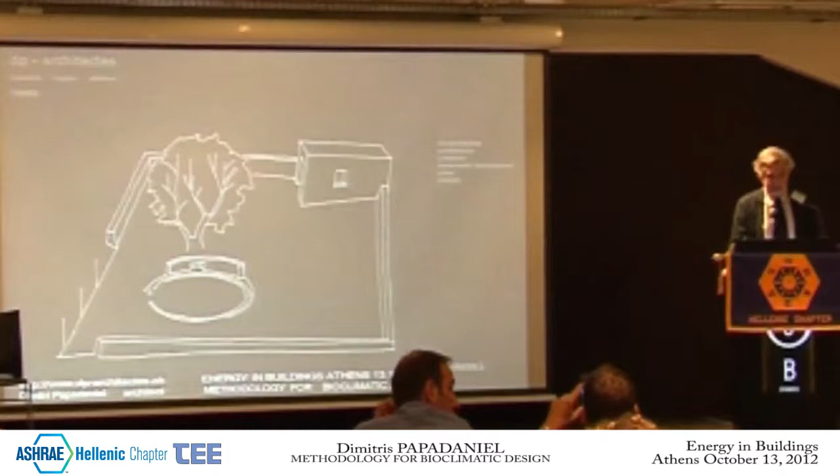I would like to thank the chair, Mr. Tsirakis, and I'd also like to warmly thank Jean-Louis Scartezzini, for he really emphasized on the sort of cooperation there should be between architects and engineers. And this is very important. This is actually what I tried to insist on this morning in my opening speech.

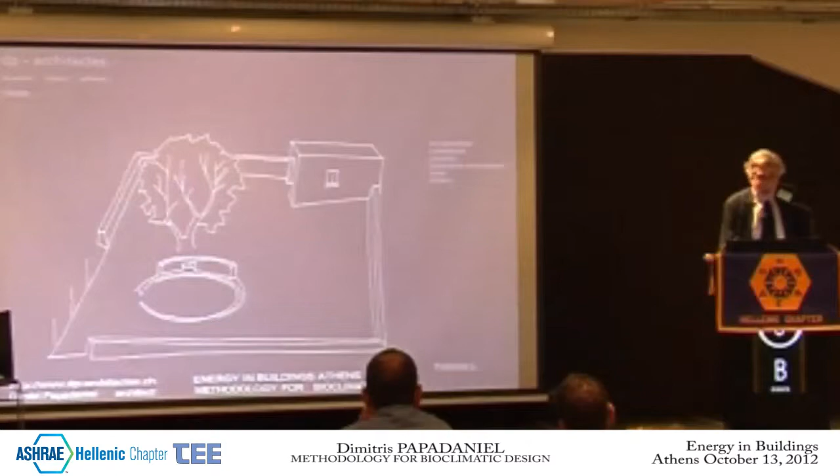What we emphatically call bioclimatic design today is nothing more and nothing less than the rational approach of planning for technical projects. So this brings together the civil engineer, the mechanical engineer, and the architect. They're all working together, which means that in bioclimatic design, there is a set of parameters that we need to take into account, including the environment, topography, climate, the landscape, the city or town, respect for the environment, and energy management.

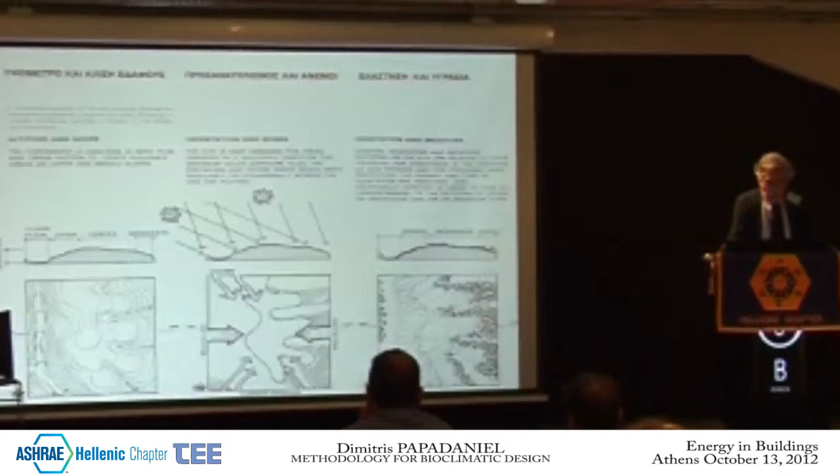No matter which way you might look around the globe, traditional architecture and projects are in line with rules and the technology that aligns itself with nature, landscape, local climatic conditions, topography, the fabric of the city, and of course use of local material matters.

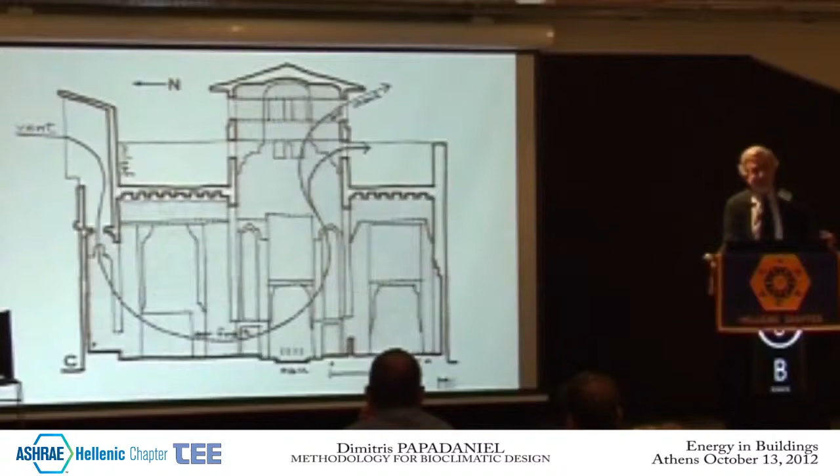What we are discussing today, free cooling, has been there by tradition. So free cooling is not actually something that wasn't there. It's not every day that we discover the principles behind architecture and physics.

I could, in a rather trivial manner, say that tradition is intertwined with our background and experience. So tradition is there to teach us. Every form and shape corresponds to particular circumstances.

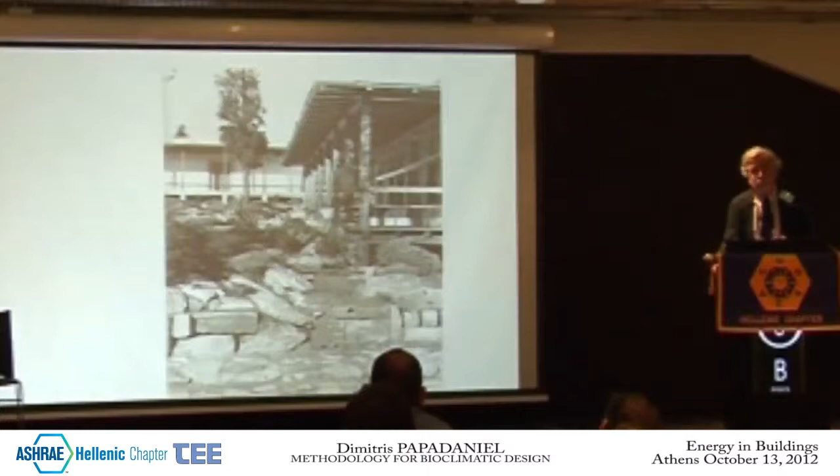All the concerns about bioclimatic architecture are quite apparent, along with the basic fundamental principles thereof. They are obvious in major architects' projects and works such as Pikionis, who used local material, and Konstantinidis, who played with the light and the shadow. He would just make terraces or gardens for daylight or maybe evening.

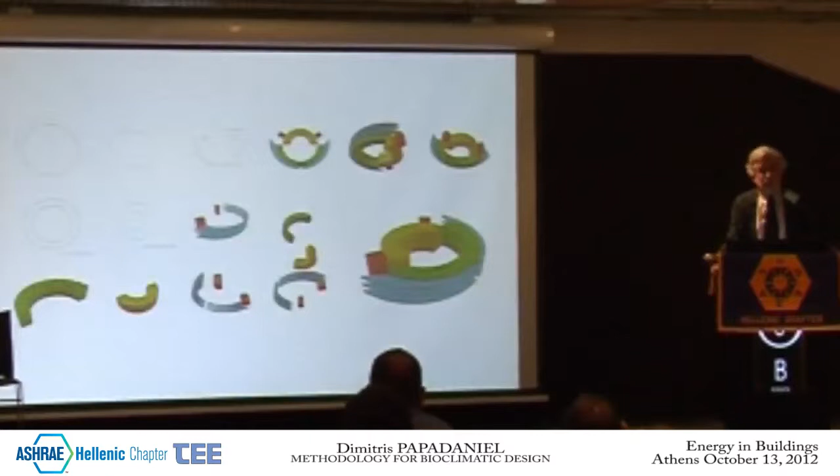And then Zenetos, who quite early had come to realize the importance of the sun's geometry, mostly through the Agios Dimitrios school he built, because he introduced a design that aligns itself with the course of the sun through the day. And so classrooms are quite protected in terms of intense solar light, but the overall outcome is quite impressive.

So, before the majority of people realized there was an issue with regard to energy consumption and savings, before people actually thought about environmental protection, it seems that everything was there. It reminds us of the bourgeois gentilhomme of Molière, who had been speaking prose all his life without really knowing it. So the overall problem that contemporary societies are faced with is quite complex.

Because it regards the protection of our planet, the legacy and heritage of the planet which we need to preserve, quality of life that we need to preserve, our economies, production, peaceful balance for the sake of everyone on this earth, and the preservation and protection of our children's future. So this is all integrated in the notion of sustainable development and viable development.

When we talk about planning, designing, and constructing buildings, there are some fundamentals that we need to bear in mind always. Like I said before, we have to bear in mind the topography, climate, urban characteristics, the environment. We have to carefully select materials we're going to use. We have to ensure there's solar protection, cooling, ventilation, and maybe renewable energy sources will be used.

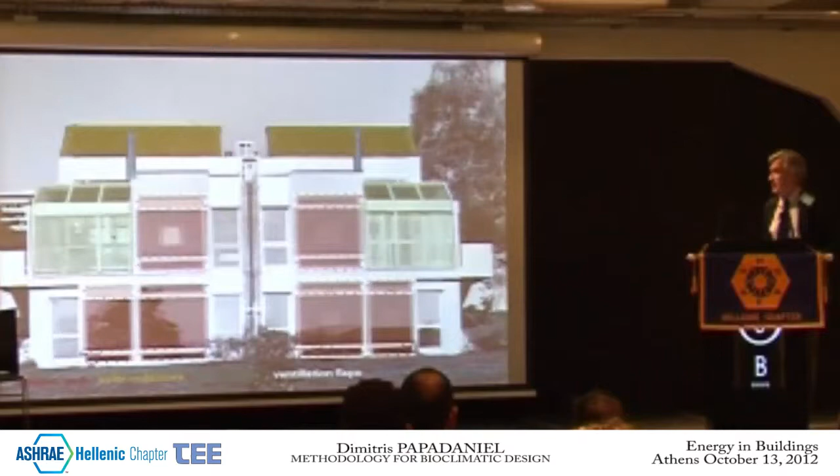Take advantage of. Trombe walls, I guess, are something you're familiar with. Maybe we're no longer using them; they were quite popular a few years ago, part and parcel of our experiments. We also have solar panels to get warm water, and we're also using those panels for heating. We also have verandas and greenhouses overall; we get the air through them and use that part of the air to complement heating for the house. And then you have aeration and ventilation systems in the walls.

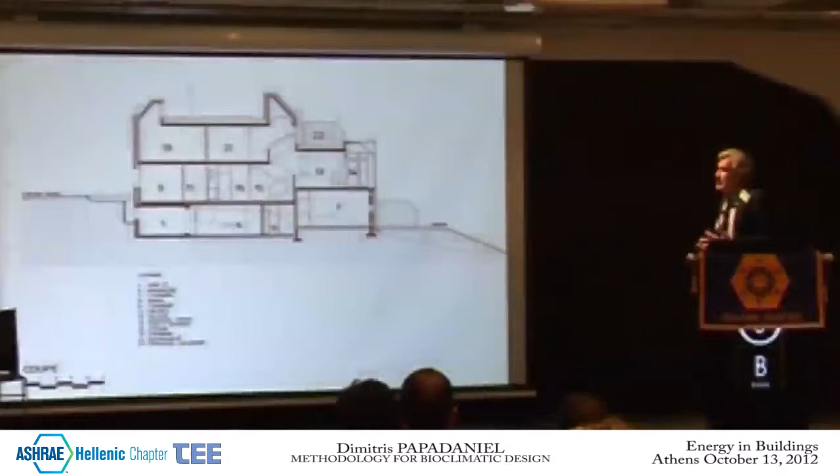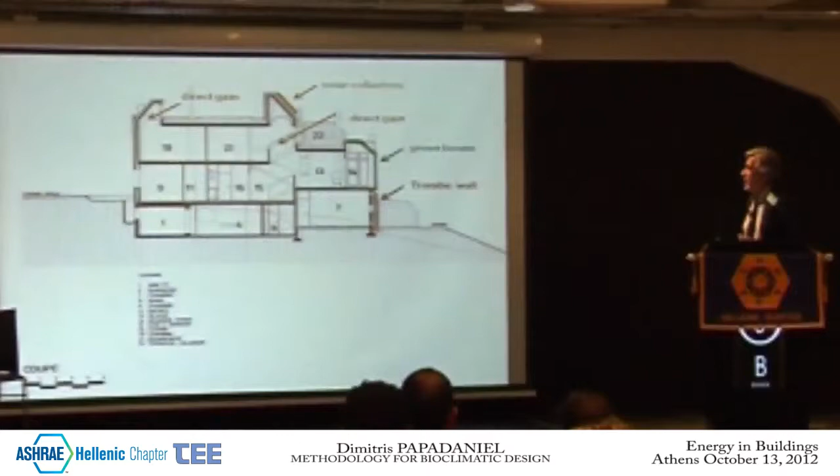Here I come to the issue of morphology, because I touched on it before. Earlier on, we talked about bioclimatic design, and in this particular case you have a narrow house, and you have the cross-section. We are aligning ourselves with the sun, using solar collectors, direct lighting, direct gains there. Greenhouse and Trombe walls are used.

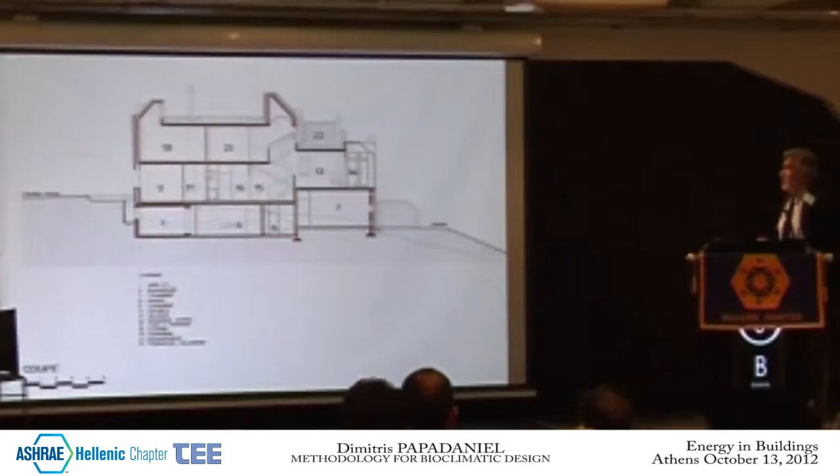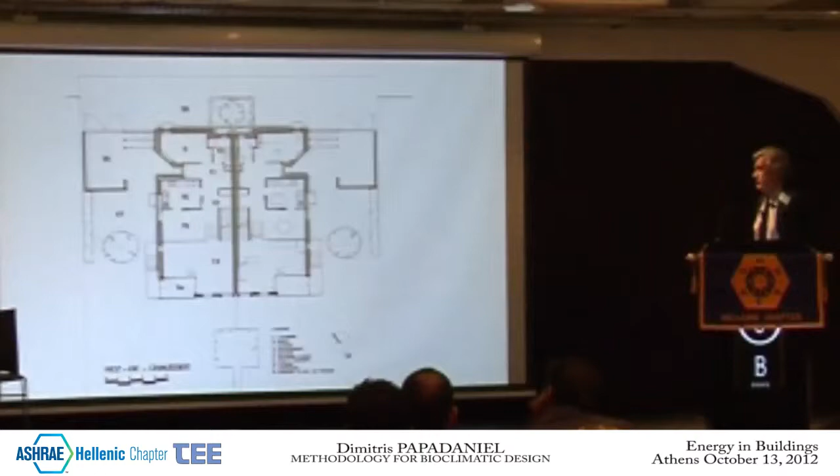This house was designed in such a manner as to ensure there is natural ventilation and cooling in the summer. Moreover, this is a well-insulated house; we insulate it quite strictly, and we avoided thermal bridges. And of course, we are capitalizing on the sunlight, depending on the geometry we opt for.

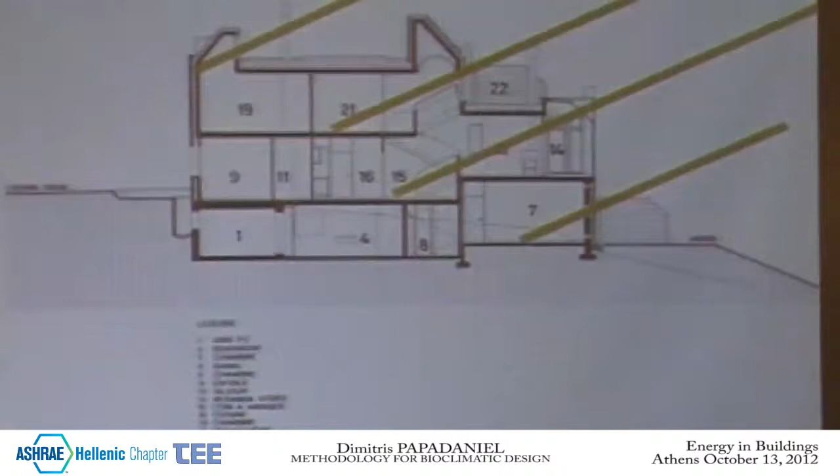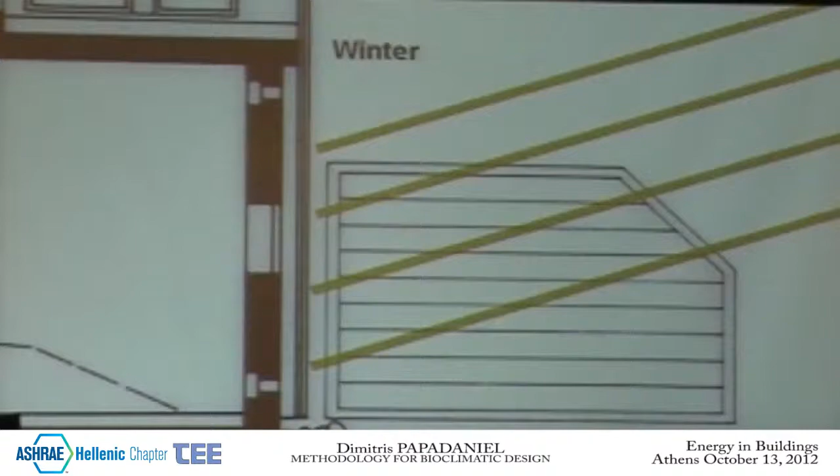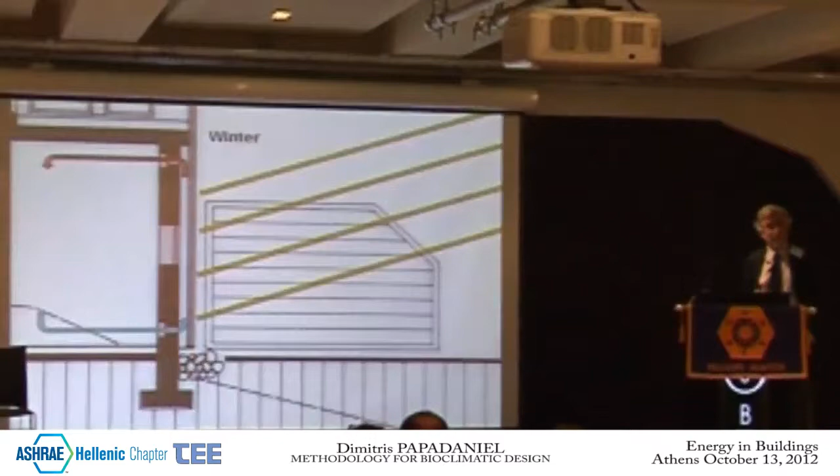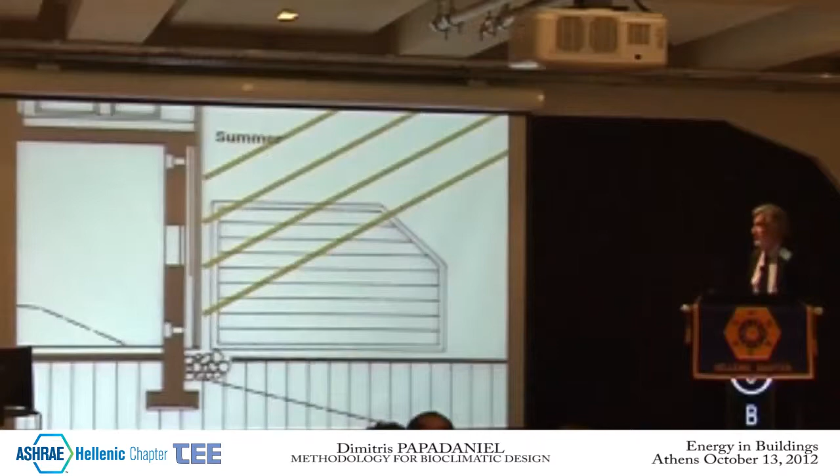Trombe walls, as you know, are charged and heated by the sun in winter, and so there you have thermal circulation, which helps keep the room warm. In this case, this whole system and methodology worked perfectly. And then you have the summer, where you have protection and at the same time simultaneous cooling and ventilation.

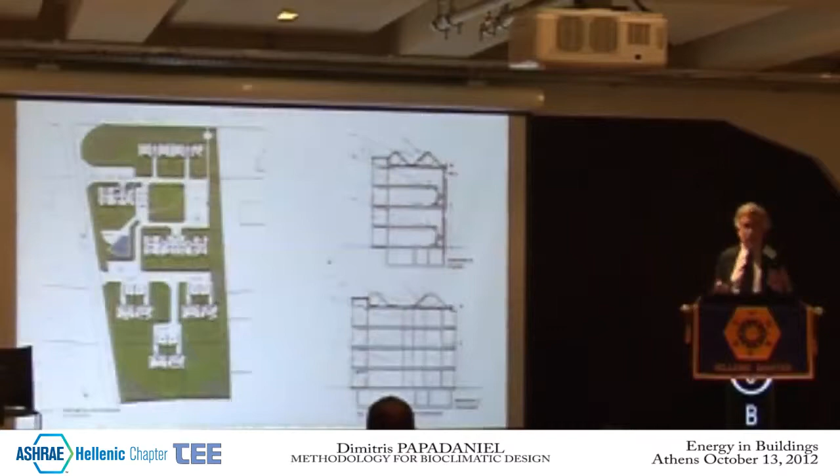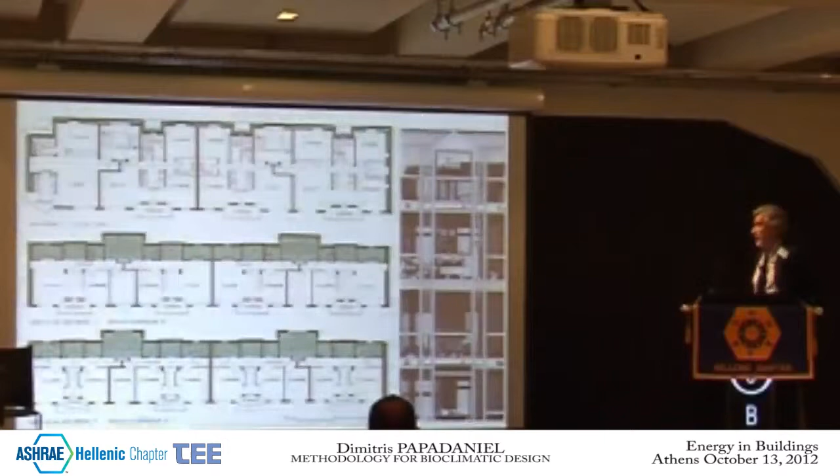I am just touching on several experiments which we've been conducting since 1985 and through today. Here you have another photo, a solar residential complex close to Lausanne. In this case, the houses are positioned so as to avoid one shadowing the other. We are using several typologies to make sure we protect the houses from the cold, but we're also using methodologies to protect these houses from the noise. This is actually something that both Mr. France and Mr. Berriela touched on earlier, because they were both concerned with protection against noise pollution.

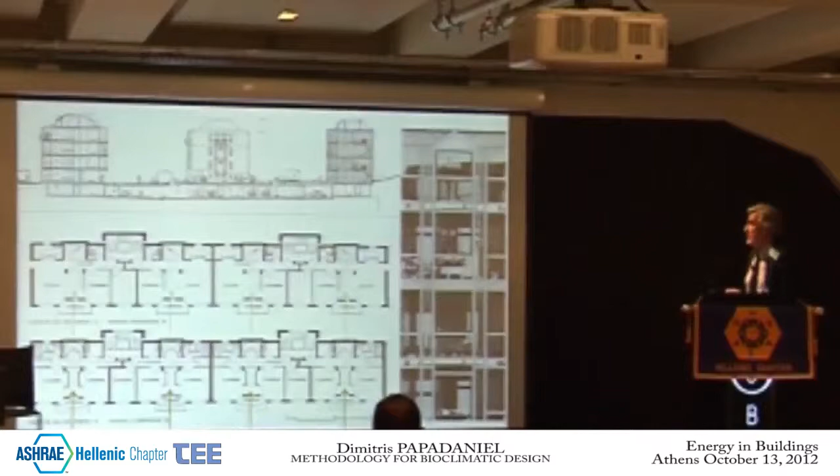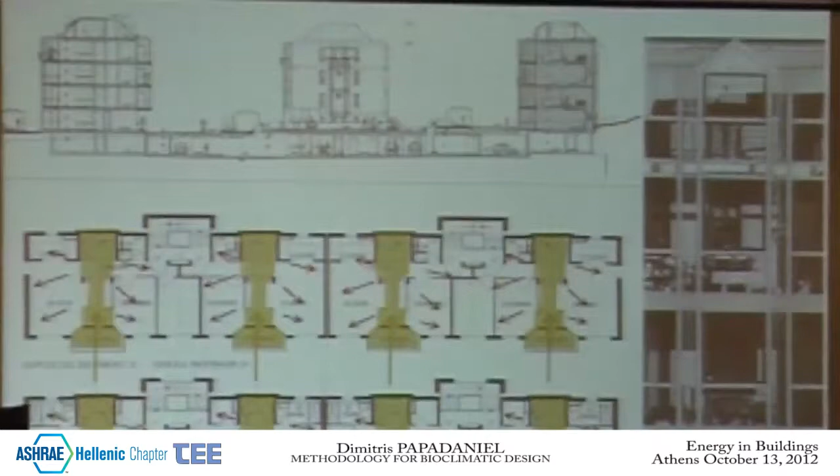In those very typologies, let's opt for one. In this case, you have the light penetrating the houses, just like I showed you before. Light goes into the house through slits we've opened, and so you have openings that work on two levels, keeping the interior warm and having the light reflect to adjacent rooms.

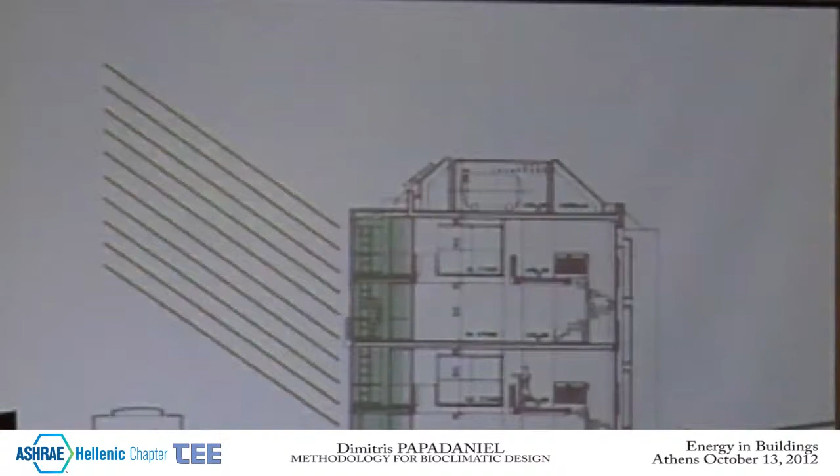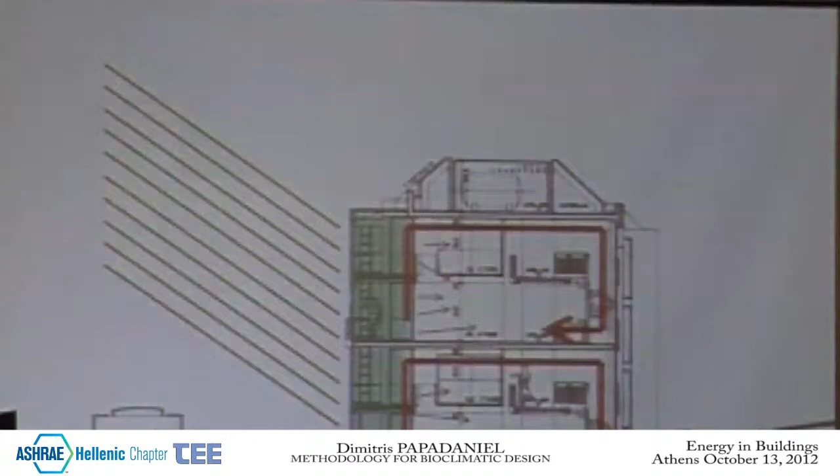Moreover, here you have an aeration system of ventilation. You get warmth through the solar light coming in through the porches or the greenhouses, and you get, again, a dual system because the walls get warmed in the greenhouse, veranda or terrace, and then there's a system which carries the air inside the house. This residential complex.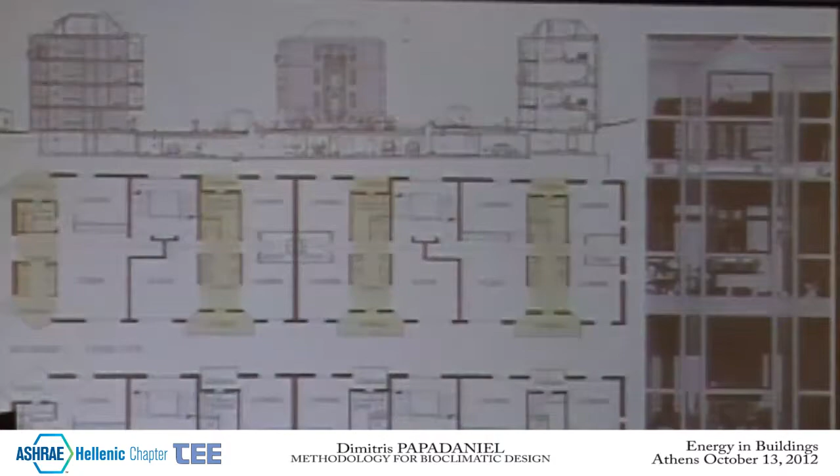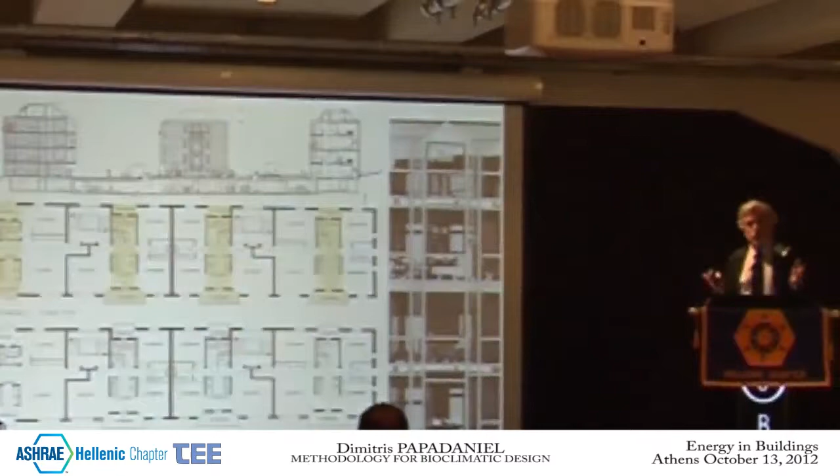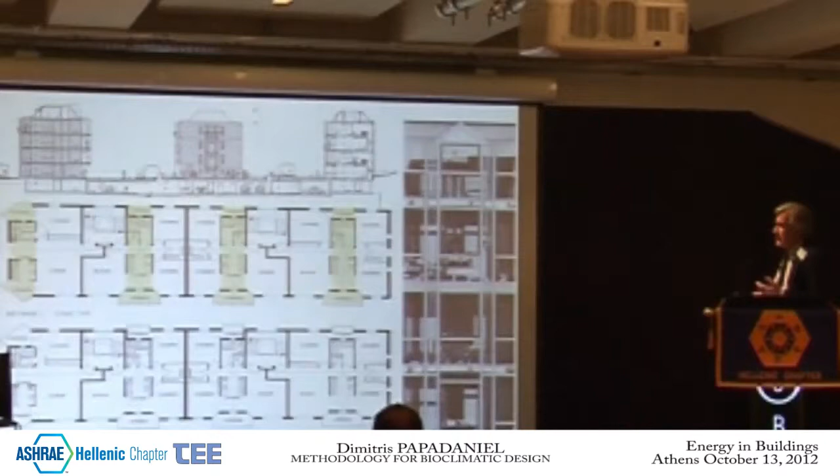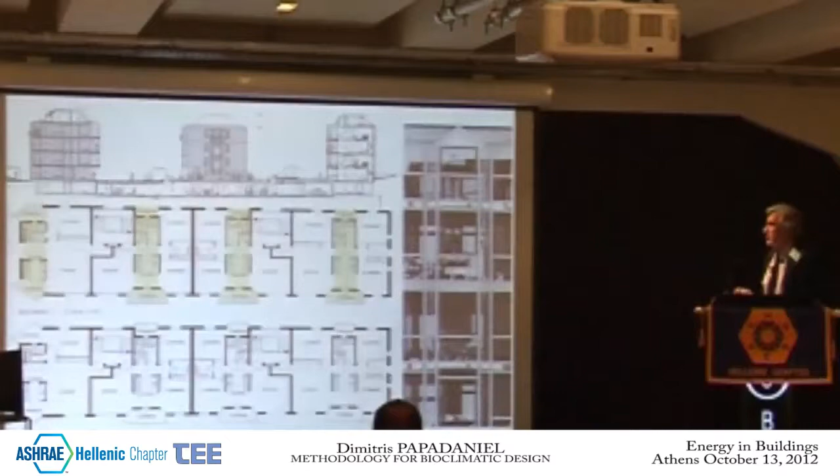Remember, we showed you earlier blocks of flats that were two-story ones, but in this case, we are dealing with flats that take up each one floor. We use whatever generates energy, placed at the center, and the systems are linked to the verandas, be they north or south, so the orientation also helps us collect light.

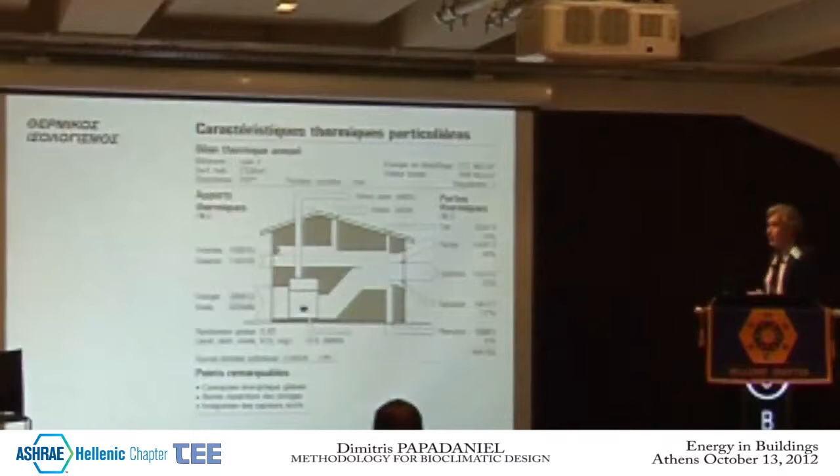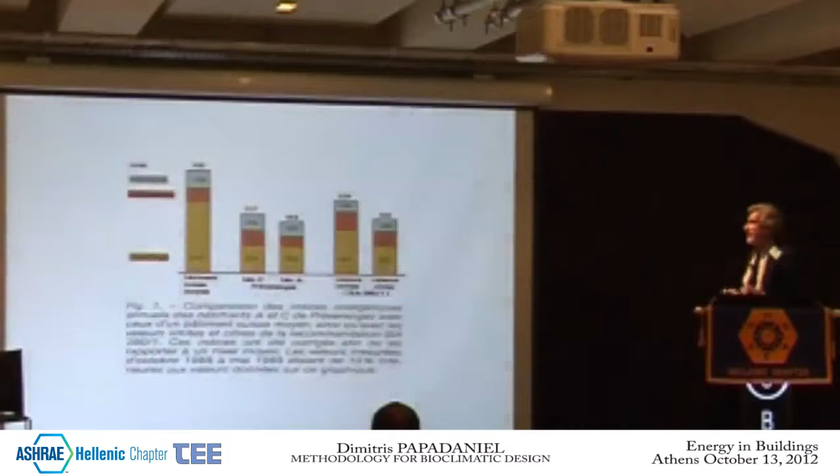There you have an idea, and here you have the great thermal outcomes and results you can get energy-wise. We proceeded with an analysis of data collected from this particular complex, using the Réseau lab, and made a comparison between the data we collected and more traditional, less bioclimatic residences to assess the importance of consumption.

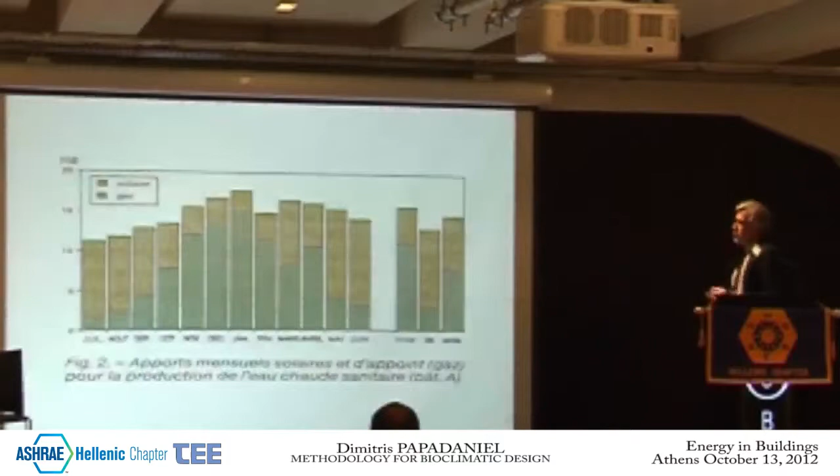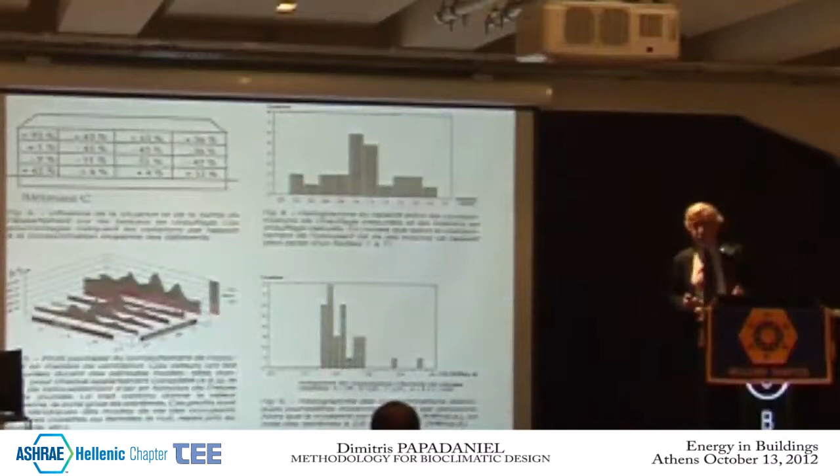I'm not going to dwell or elaborate, but this shows you how much natural gas or solar power we use to heat water. The Réseau, or the lab, also proceeded with an important analysis because, as Mr. Cartesini said before, depending on the user and the family, some apartments have minimum energy consumption and others exceed the average.

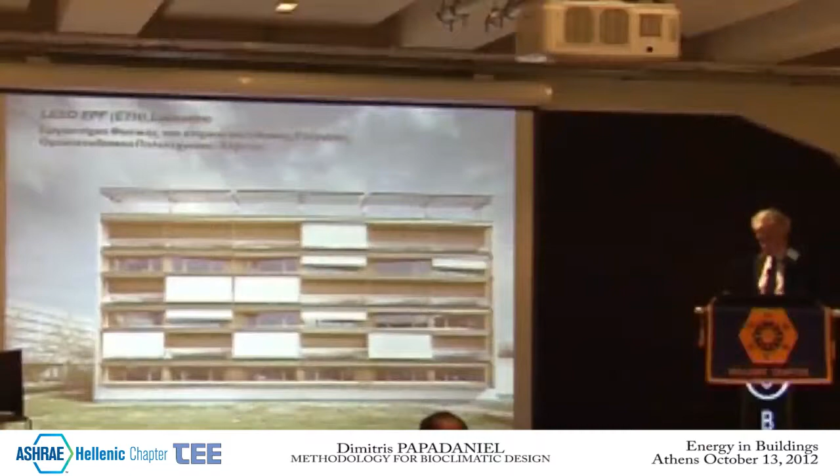And quite often you come across households which go beyond the confines you've set. Which brings me back to what I said before, the role of the occupant, the individual consciousness is quite important, which brings me back to LESO. Let me add one more thing concerning the planning rationale.

In this particular case, we also drew on a traditional piece of thought. We used local wood, which is there, not painted nor glazed, but we have shades and louvers. You have a sort of roof on every story, on every floor.

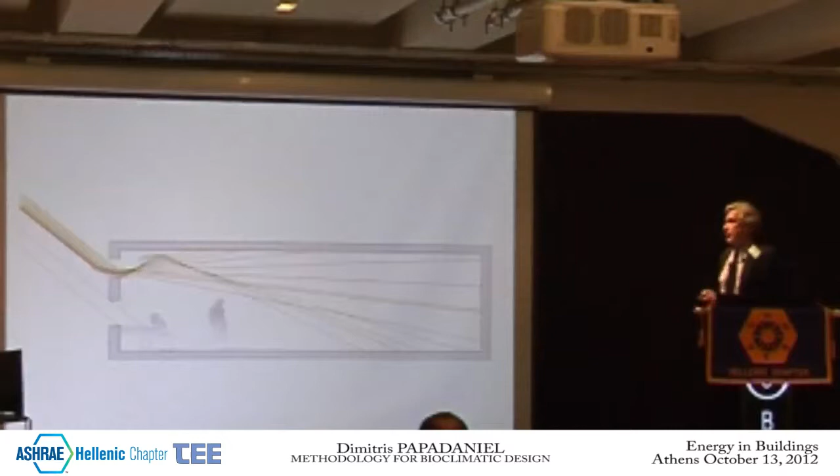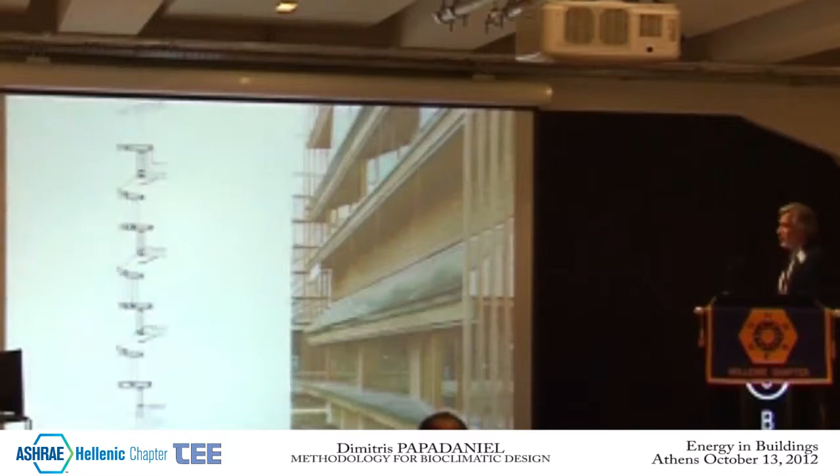I'm not going to give you the details because this has everything to do with what the previous speaker said, which all goes to show that we are using this part of the building. So you get sunlight from the east, and these extensions mean you have broken down to 3 layers every floor: the upper part for lighting, and the lower part with very strong insulation.

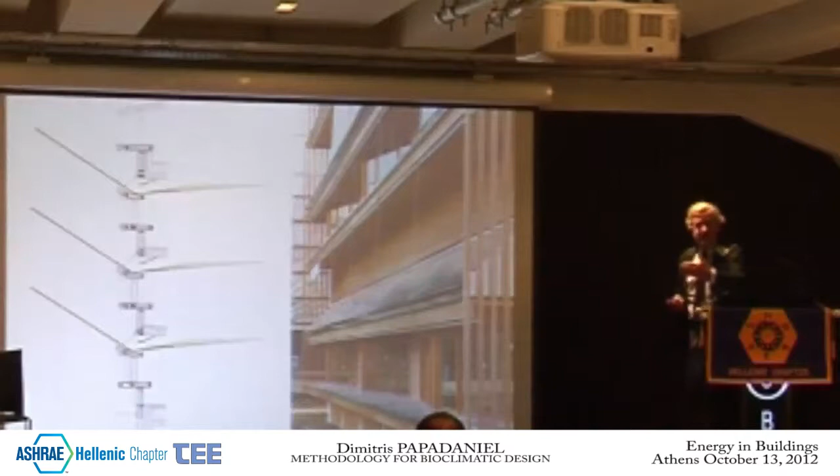So in this case, we are capitalizing on those extensions to protect the material, which is the wood. I think the building is in rather good condition, even after so many years, so it doesn't call for more maintenance. Protection.

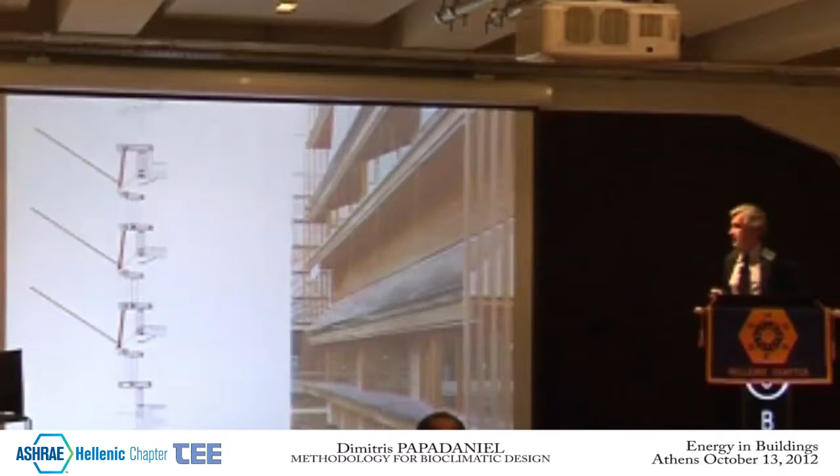When we talk about bioclimatic design, we use wood in this case, a material that has negative CO2 consumption, as was referred to as well, but we also have to make sure we protect this natural material. You can't just use it as a decorative means. Each local material has its own features, specificities and character, so any constructor or architect planning to use wood or any other natural material needs to carefully think about what they're going to do with it.

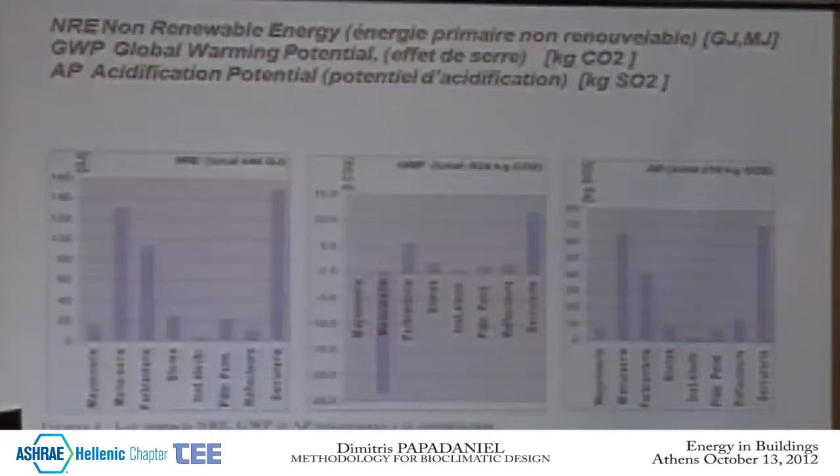One more complementary note: we also analyzed the ecological cost of the facade. LESO proceeded with that analysis a few years ago, and people there tried to calculate carbon dioxide emissions cost, the imprint, if you will. Here you have the analysis of materials used, and this slide shows the non-renewable energy, global warming potential, and acidification potential, depending on the type of material, their respective consumptions.

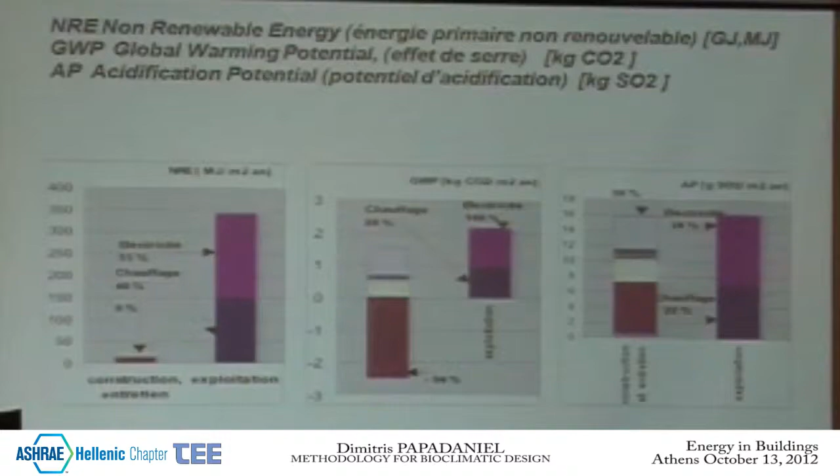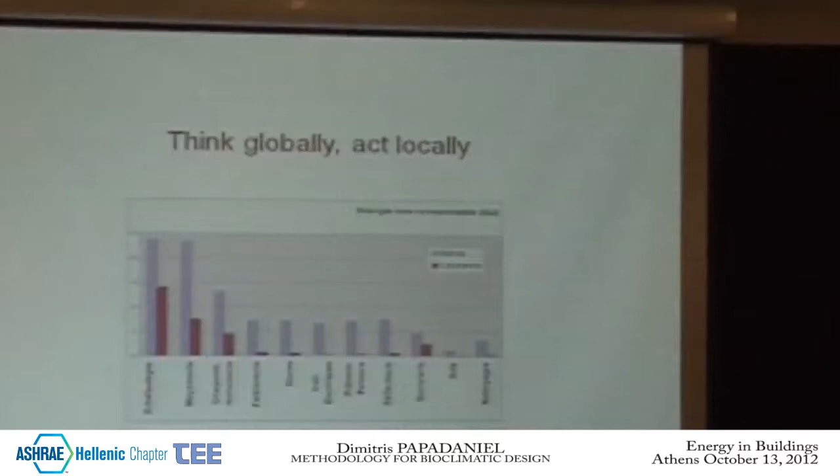There's reference to metal, for example, and other not so eco-friendly materials, as well as reference to distance, way of construction, exploitation, and use by the users. In this particular case, Mr. Cartesini and his team, and then there's reference to...

the distance from the work site. We made a comparison of groups of workers: red stands for the teams that worked on site because we hired locally, and grey stands for potentially hiring people and crews from another city.

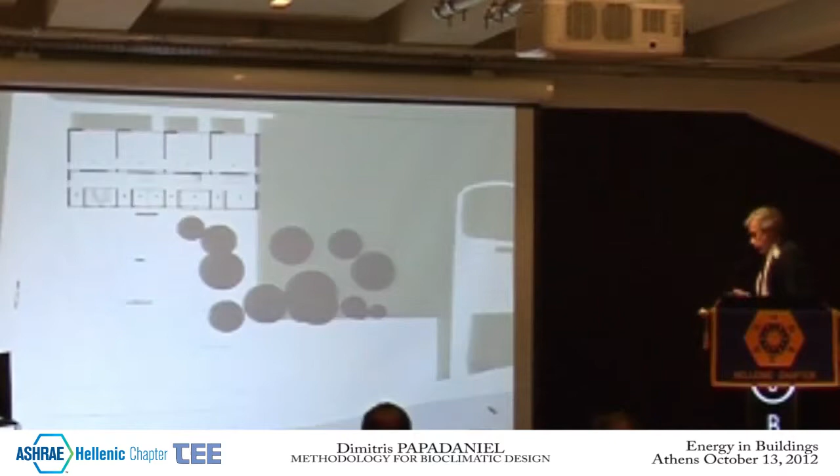Another example that I'll rush through regards a free cooling system used in a school in Geneva. Again, we had a well-insulated building, and without opening the windows, you have a recycling of air. We have the so-called Canadian well, because in this particular case, you have the cooling of air that is being recycled as it goes underground.

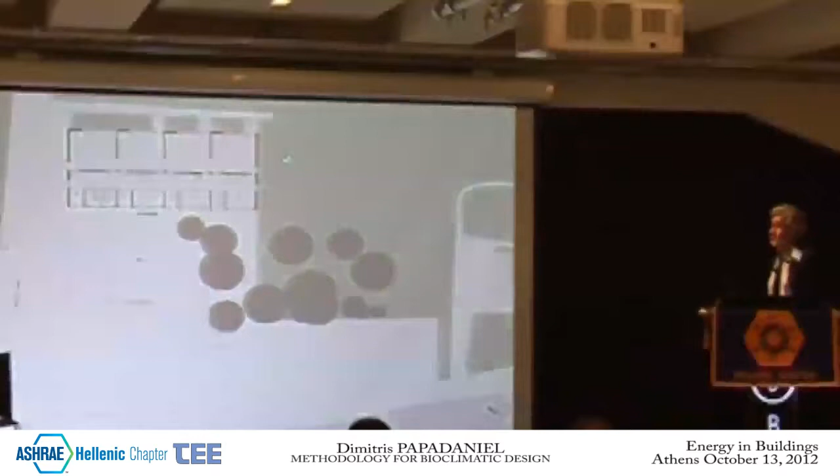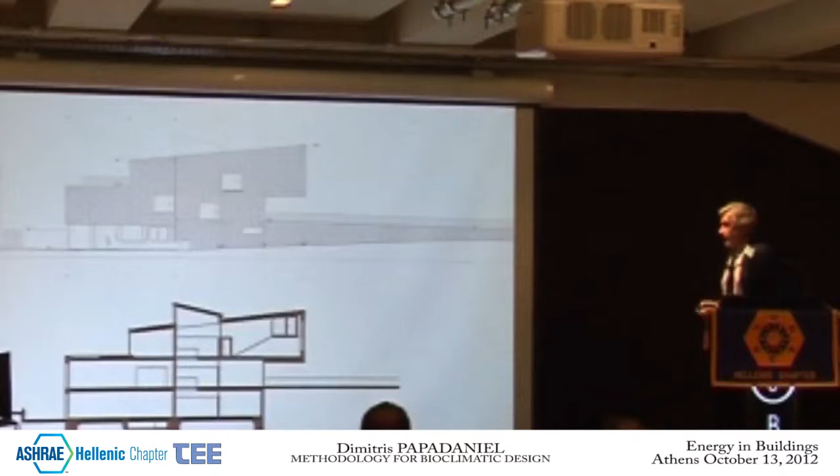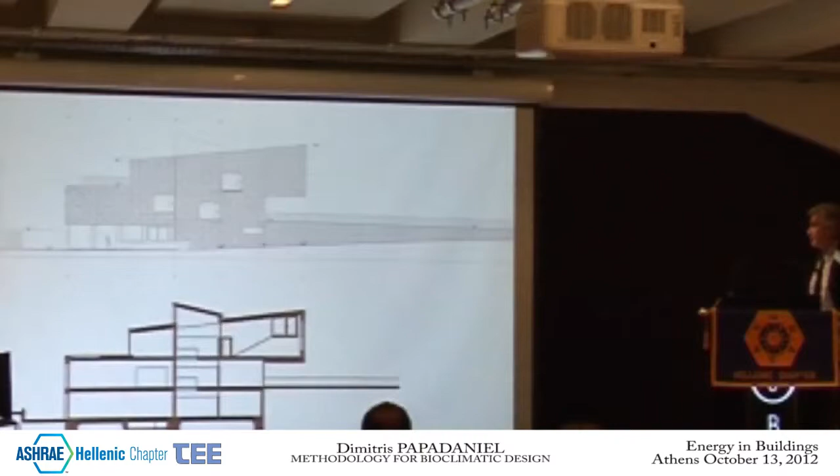What is important about this building is actually land use and economy. Whenever you build anything, depending on the form and shape your building acquires, you nonetheless leave an imprint on the land, on the plot of land. In this particular case, we were faced with a huge park. So on purpose, we decided this would be the most compact building possible, just to make sure we save the park and have as much greenery, as many green areas as possible, for the sake of the students. So we have the yard and the park all in one.

The cross section will probably make you think of the previous house I showed you earlier, where you have the light going in at all times. Here you have aeration, ventilation, cooling underground in the basement, and that's the result: one compact building, the envelope, the shell of which is clear. You have terraces that are green and great insulation, quite powerful. The result is very, very good, we were happy with the outcome. In terms of energy consumption, I think we are at 39 kilowatt-hours per square meter on an annual basis, which is Minergie.

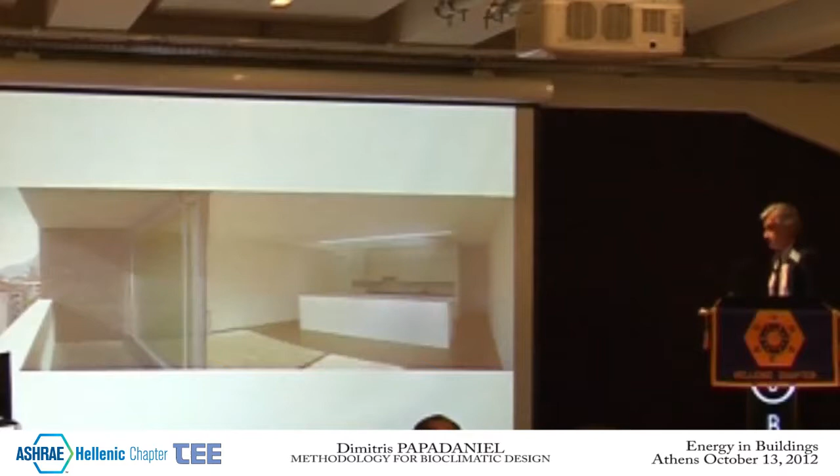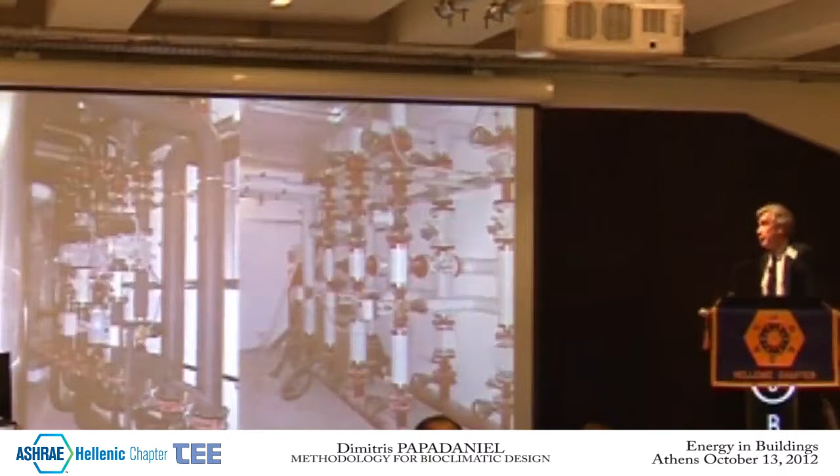How can you manage all the problems that may emerge when you're working in an urban environment? In the cities, the conditions are quite difficult when it comes to sunlight and distances. Strong insulation is always important. But the closer we get to the object at hand, you have to look for light, you have to introduce protection at night time, and then you have to see what sort of light you're going to use, northern or southern.

And in this particular case, moreover, we've used strong insulation, a material which has a very low eco cost. Of course, this is not clay, it's not what Martin Rauch talked about, but then again it's still quite an eco-friendly material, although it may be heated. At the same time, we're using a system of thermal pumps, heat pumps, so we're using, legally, water from the aquifer.

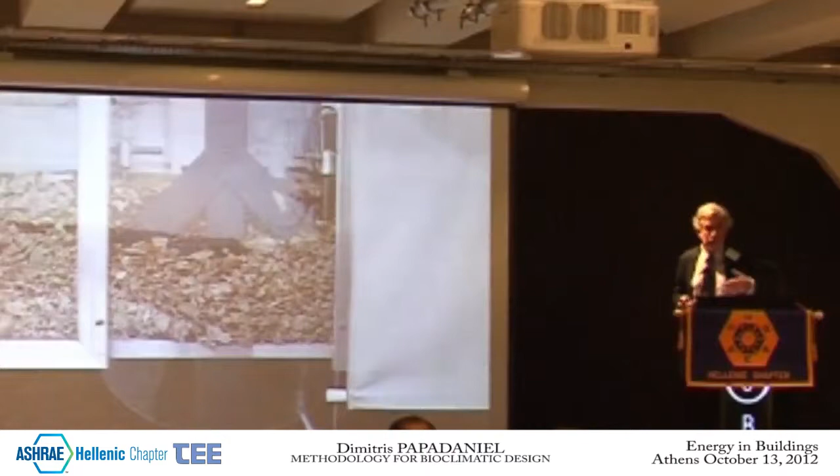Certain surveys were conducted by friends, among others François Isler, a friend, but many architects have conducted such surveys. Let me open a parenthesis: Martin Rauch showed us how to use clay and brown, and in this case Isler tried to conduct his own experiment. So he used recycled aluminum. It's a very interesting piece of thought. He just used a recycled aluminum profile. He thus created double glazed panes.

Among the two panes, he uses ecological materials. It's just part of his research. Maybe he will use straw or anything for that matter. In any case, thus he makes something whose cost is really, really low. And a few years ago, he also went on to try to not use foundations, which brings me to a very critical issue, because this now brings me to the Greek condition.

So energy economies of scale, energy saving, bioclimatic design for existing and new buildings ought to take into account the fact that each and every Greek family apparently owns the apartment they live in. So you have blocks of flats, and blocks of flats for Greece are actually a unit which is there, and there are lots and lots of blocks of flats that make up the cities in Greece. This is a reality of the Greek urban environment, and this reality is well entrenched into the idea of private urbanization, private residences, private uses for public areas, private uses for the landscape as a result thereof. And this concerns all the existing buildings in this country.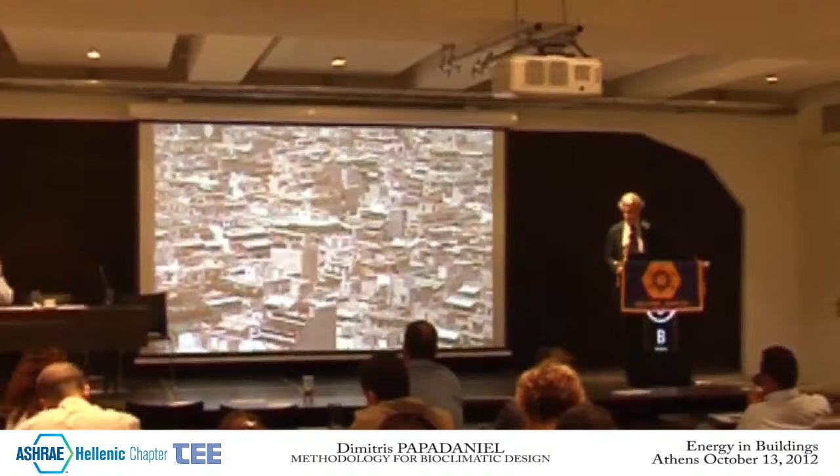Mr. Scartezzini showed us a building you actually built. So this was your building, and I think you also showed us a slide where there is a fraction of the light, right? Because there is an anidolic shelf. And at the same time, there is also the lower window, which gets light in at the same time. So when you are dealing with an office space, an office building or a school, I guess this is not necessarily useful, and maybe it can actually be the cause of glaring, and it could be a problem, right? Especially in winter, when the angles are low, small.

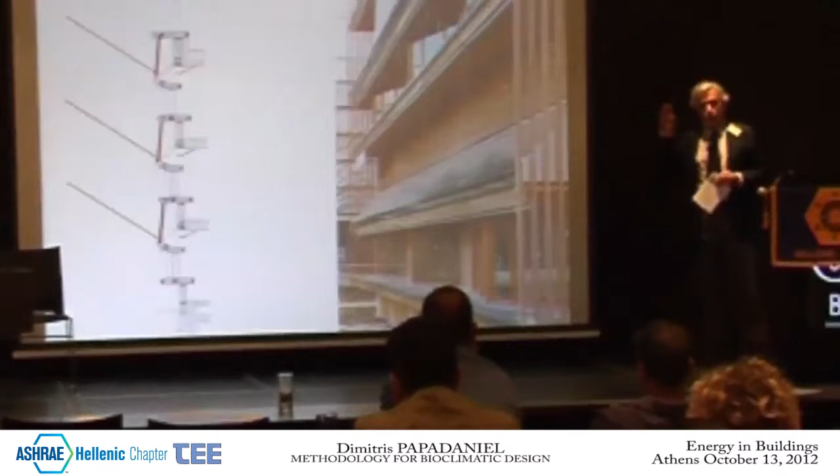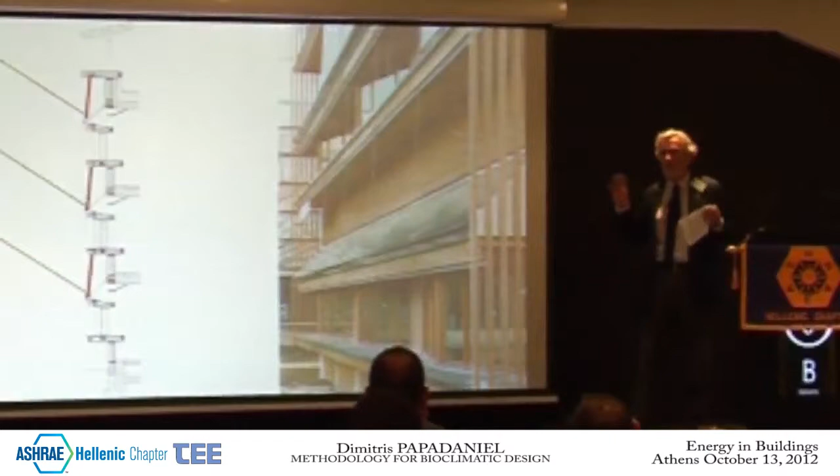Right, so this brings me back to this photo. When this building was built back in 1982, it consisted of 9 cells. Each and every one of the cells was equipped with an electronic facility that was linked to our computer. So you could intervene in individual cells and use buttons to change the values. This was sort of automatic. You could actually use it from a distance, and this particular lab is oriented towards the south.

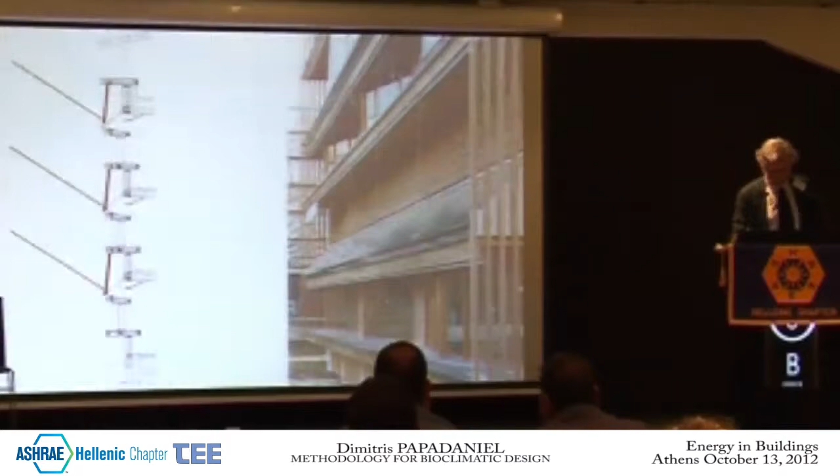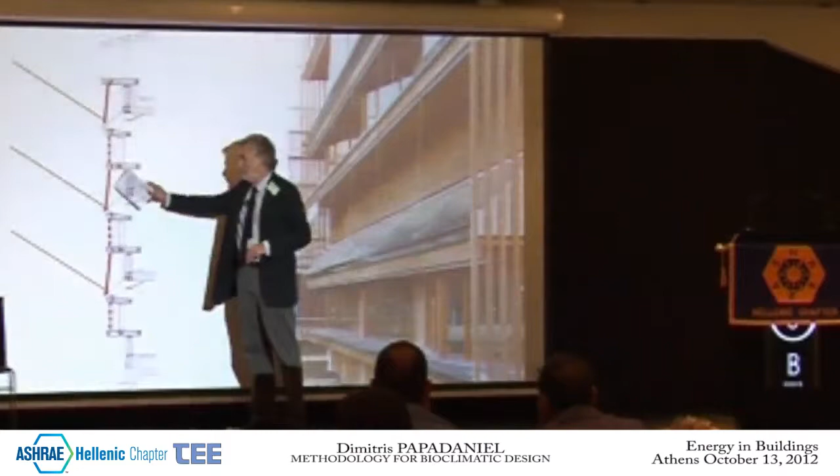And there is another thing. There is moreover a system, an independent system. In this case, when you get lots of light, this system protects the anidolic system. And the user themselves can protect and shade their own working area. This is a dual system to help people who are working at their desks keep in touch with what's outside. So you are sitting at your desk and working, but you can actually use that. You know that in winter you have light getting in, which can be an issue, but then again you, the user, can protect yourself. You have a sort of fabric there which you can lower as a louver. Here's your working area, and here is your anidolic element.

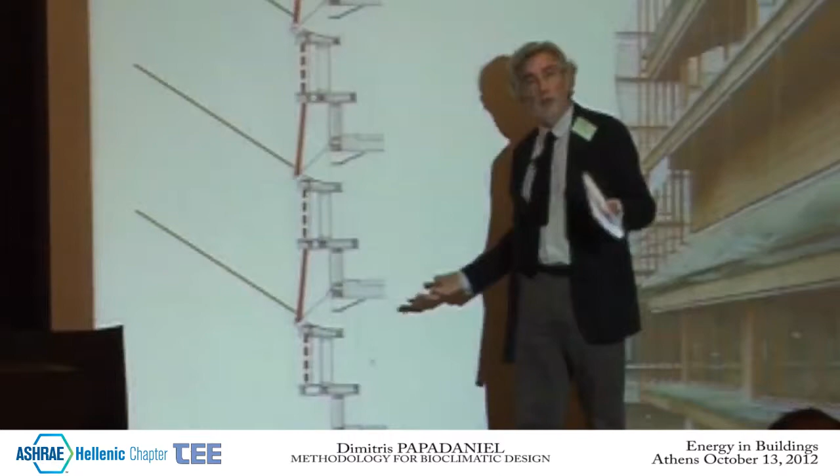I don't think that our dear friends have been getting lots and lots of light, have they?